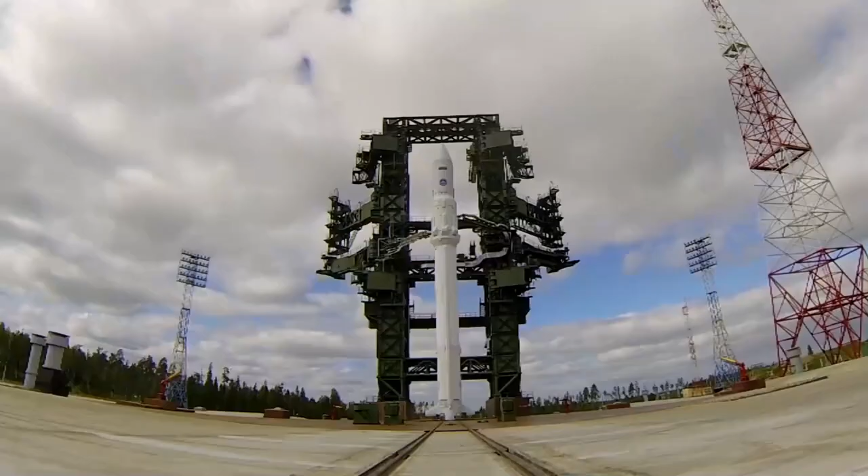Engaging the second system of telemetric measurements. Control parameters are normal. First engine start, go. Contact recovery, go.

We are at the Chkalovsky airfield, where we are about to end a journey that started 20 years ago. On board a military airplane, we'll fly to Plesetsk, where we'll take part in a pioneer rally. There will be plenty of fire, flying, and the one and only pioneer that will open a new era for Russian spaceflight.

Under the cover of the Arkhangelsk taiga lies Plesetsk, one of the largest cosmodromes in the world and also the most northern. It was built in 1960 as a base for intercontinental missiles. It was meant to be lost on the pages of secret documents. Even the roads were masked, protecting against filming from the air.

But today, this is not just a military facility. It is the most important test, research, and of course, launching platform in Russia. To date, Plesetsk has produced nearly 1,600 launches, checked 11 missile systems, and occupies a territory of 176,000 hectares.

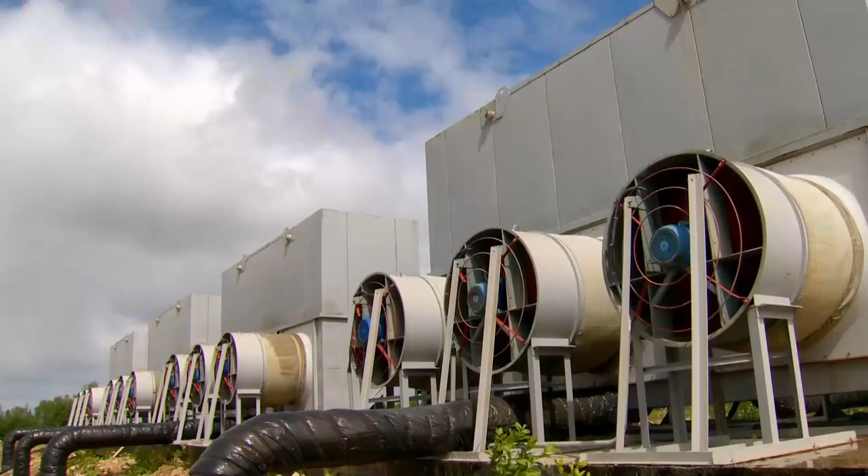The platform has launch complexes for the main Russian rocket carriers: Molniya M, Soyuz, Cyclone, Rokot, Cosmos 3M, and missile complex Topol M. But that's not all. This is where Russia has the opportunity to deploy its rockets into geostationary orbit at minimum cost.

Before, all the heavy rocket carriers started from Baikonur, located in Kazakhstan. But thanks to the Angara project, Russia will finally acquire its independence in space. We decided to take a closer look at the future of rocket building in its natural habitat.

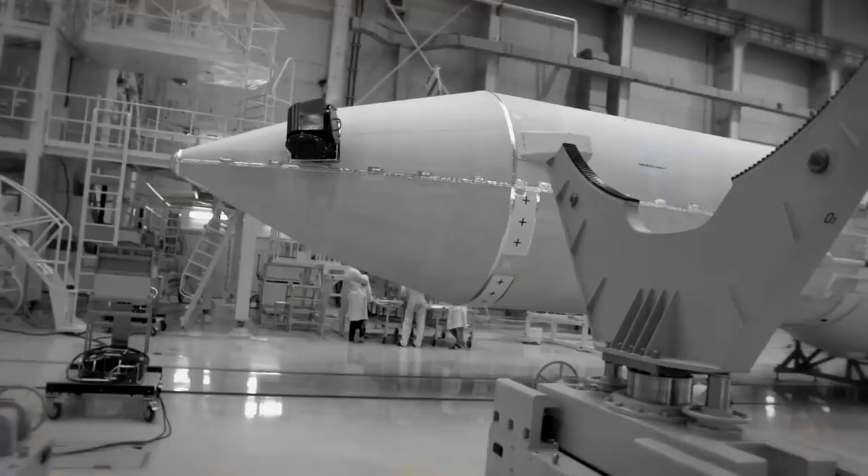Angara is a whole family of light, medium, and heavy class rockets with an oxygen kerosene engine, created based on a universal rocket module. The first one to prepare for a trip into orbit was the light rocket carrier Angara 1.2 PP. The main goal of the launch was to check the engines and rocket systems, including the navigational and telemetric equipment, as well as the proper functioning of the space rocket complex components.

The cargo layout mimics the head of the rocket payload, and having passed 5,700 kilometers, it will land in a specified area of the Kamchatka Peninsula.

It was here in this spacious, bright room that the most important stage, the final assembly of the rocket, is held. This assembly test body has all the necessary equipment for the independent testing of missile units, its assembly, and subsequent loading onto the transporter.

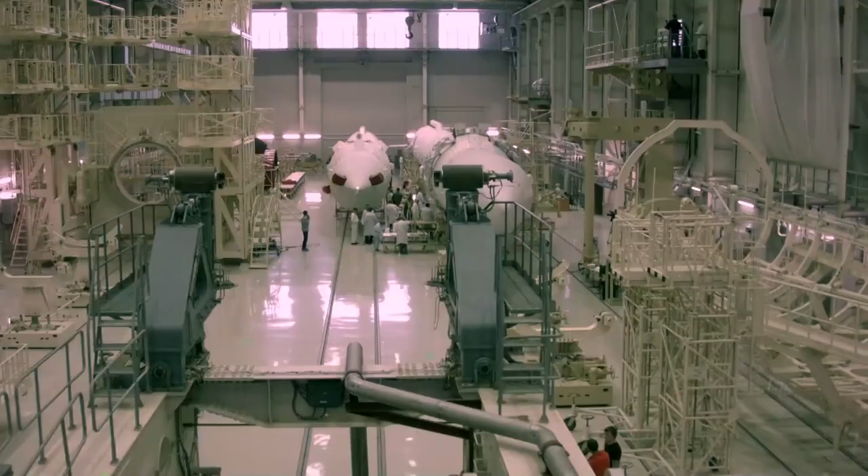The entire history of the Angara is like a reflection of Russia's recent history. Conceived as early as 1992, the rocket passed through the echo of USSR's collapse, the criminal 90s, and even the economic crisis of 2008. And now the Angara project comes to the finish line, holding its first test start.

This is the layout of Angara, but not just an imitation, but a complete missile, able to send a satellite into orbit if needed. Alexander will tell me about its components and the principles of modular assembly. Yes, indeed, this rocket carrier was built according to a modular assembly principle.

The rocket consists of a Unified Missile Module 1 and Unified Missile Module 2. If necessary, the missile modules can be arranged into a light-class rocket carrier, as we see now, and also into a middle-class or heavy-class launch vehicle.

Angara 1.2 PP consists of a first stage, second stage, nose fairing, payload weight layout, and booster. By adding universal rocket modules, URMs, we get a whole range of rockets from light to heavy class capable of performing a variety of tasks for the needs of military and space.

One launch pad for light, medium, and heavy rockets, only thanks to modularity. Yes, the system is the same in the starting complex and the processing facility. No changes or additional preparation when changing the rocket would be required.

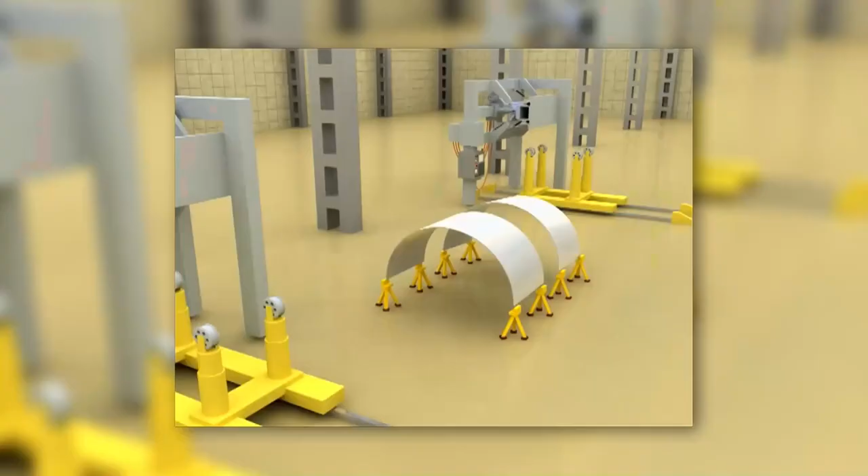The lead developer of the missile is the Khrunichev Scientific Production Center, one of the largest branches of which is in Omsk. At the Polyot Industrial Association, URMs are assembled for the Angara.

First, they work with the preform for the rocket fuel tank. They mount the technological rings and other accessories for loading and docking. Next, there is a connection of the longitudinal joints by friction welding.

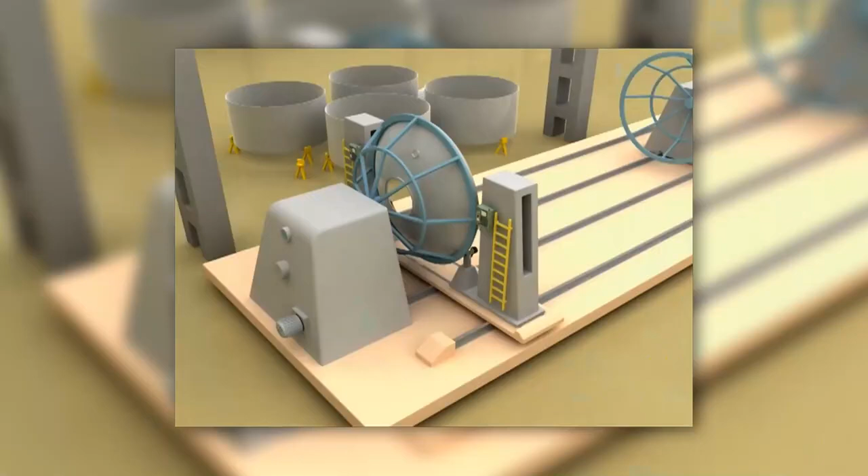Today, this is the most modern technology, based on the principle of friction between different surfaces until a complete merger. In contrast to conventional welding, friction prevents thickening. On this machine, all the other parts of the missile, including the bottom of the fuel tank, will also be lapped onto each other using this method. Next, the bottom is welded to the tank, and so we get a tank for the URM-1 oxidant.

With the help of technological rings, the tank is turned over to a vertical position in order to check for leaks. This is followed by hydro testing. The space of the tank is filled with liquid, after which they monitor and inspect for leaks.

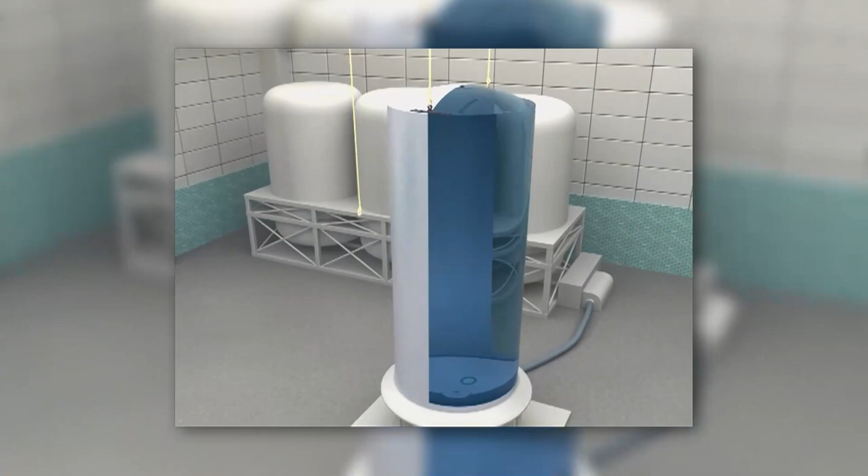Then the tank is driven into a separate chamber to install the inner tank devices. The sterility and purity of the chamber is key to the safe and trouble-free operation of the engine afterwards. The thing is, if the fuel has technological impurities from the factory, a rocket engine fire is impossible to prevent.

Apart from inner tank devices, expendable pipe and fuel level monitoring sensors are also installed into the tank. The URM-1 has separate tanks for oxygen and kerosene. After installing the inner tank dry compartment, the engine compartment and the adapter ring for the subsequent installation of the propulsion system are secured. After closing the engine compartment, URM is ready for final assembly.

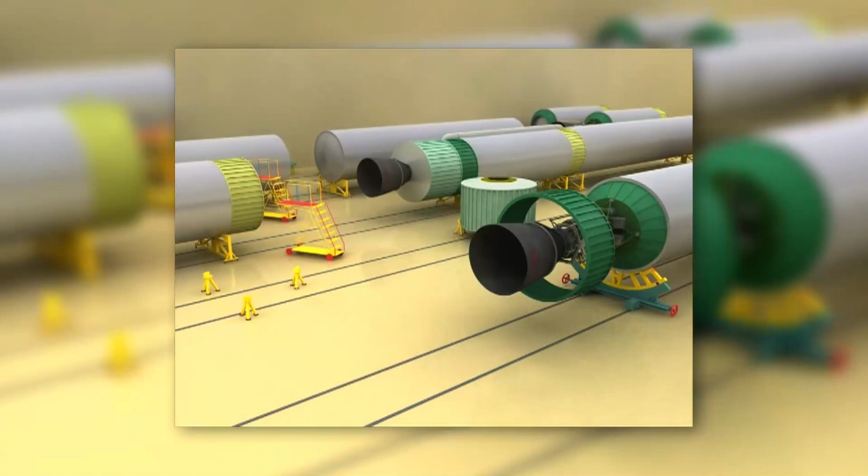The only thing that remains is to establish a trunk line through which the oxidizer enters the engine. Fuel is poured directly. After being laid down on the railway unit, the URM is sent to Moscow to the Khrunichev Scientific Production Center, and then, after all the independent tests, it is sent in an unassembled state to the Arkhangelsk region, where final assembly will begin.

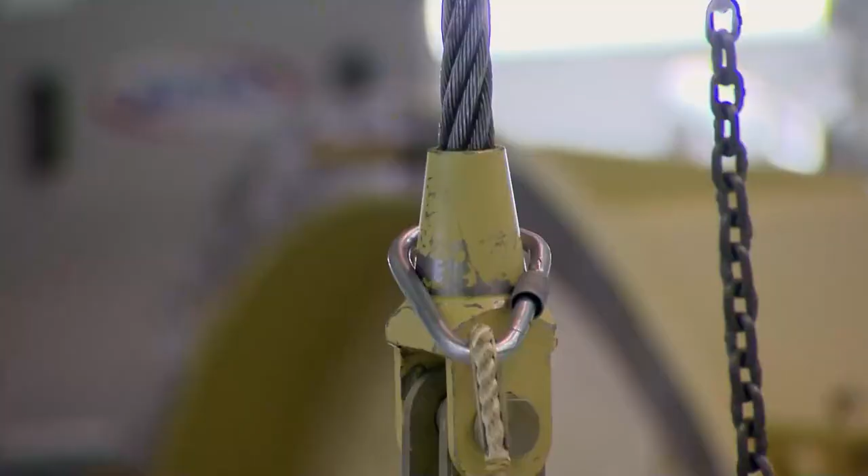Now we see the process of loading the rocket onto the installer. Next to me is Mikhail, who will tell me how the loading happens. Hello. Hello? We are now in the processing facility that prepares the family of Angara launch vehicles.

Right now, what you're seeing is the final step of this technological process. The first launch booster completed all the necessary tests at the processing facility and is ready for start. This operation makes this rocket ready for launch. The military calls this process overload. I fully agree with them.

When 18 tons of weight, that's exactly how much a dry rocket weighs, flies over you, you automatically start to feel like a dwarf in the world of giants. At the same time, in order to successfully install the Angara on the conveyor, all work must be completed with a tolerance of less than a millimeter.

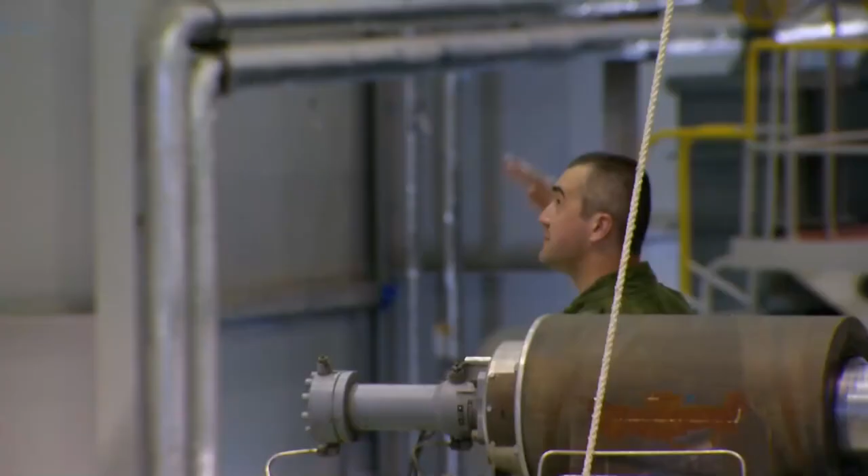Already the next day, the combat crew will take the rocket to the launch pad, where it will pass all required tests and will be prepared for launch. Taking advantage of the moment, we decided to leave the Angara and take a walk along the launch complex.

All these huge buildings behind me are just the tip of the iceberg. The Universal Launch Complex of the Plesetsk Cosmodrome has more than 200 buildings and power plants hidden deep underground. The extent of all this is staggering.

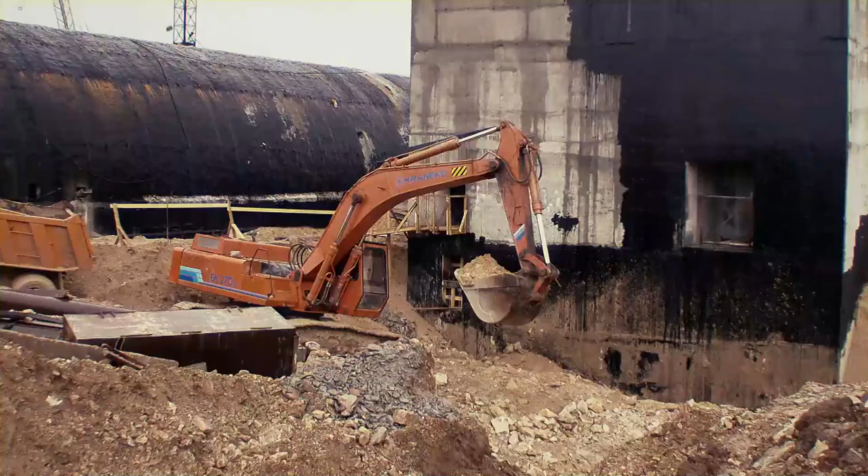Long and thorny was the path of the Angara launch complex. The fact of the matter is that here in 1987, construction of another rocket complex, the rocket carrier Zenit, started. But when in 1994 the country went through a crisis, construction froze for an indefinite term. It was only in 2000 that it was decided to build a new complex using the unfinished buildings of the old complex.

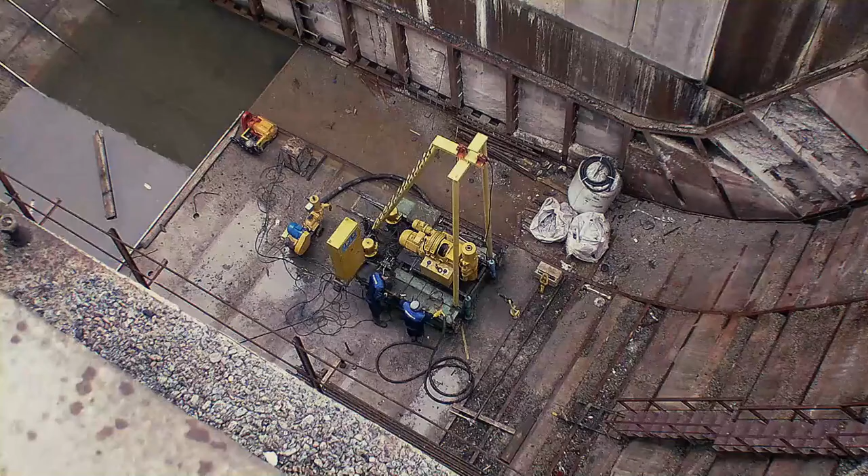Construction inherited from the Zenit complex did not have the required bearing capacity, so designers had to solve the difficult task of strengthening the foundations, basements, and walls of the buildings. A year and a half ago, the backlog in some areas reached semi-annual figures, and the defense minister took personal control of the implementation of the plan.

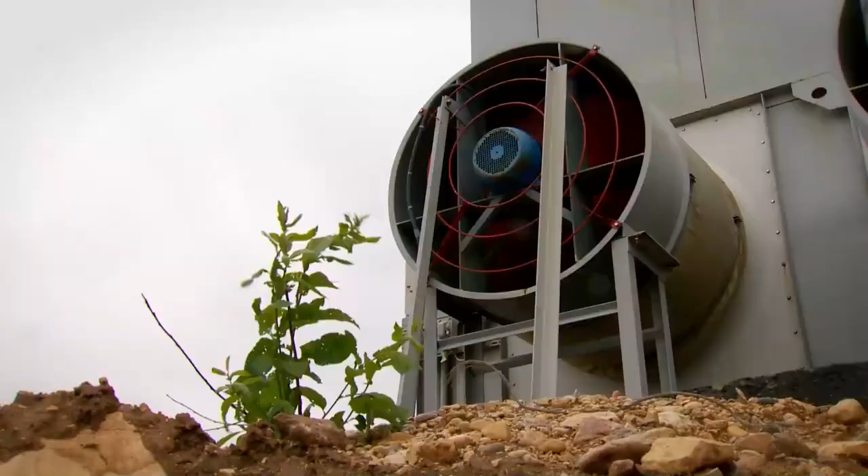The backlog was reduced, and now the Universal Launch Complex Angara comprises 22 kilometers of engineering networks and communications, more than 90,000 cubic meters of concrete, and 211 buildings that fit compactly on a territory of 12 hectares. The farthest point from the checkpoint is the starting platform, which houses the launch pad and the cable-fueling tower. To the left of it is a firefighting station. A bit further is the entrenched command post, from where the missile is controlled. The launch complex also features a thermostating station, an oxygen-nitrogen plant, refueling unit, compressor station, and effluents, not counting the external power supply and water supply installations.

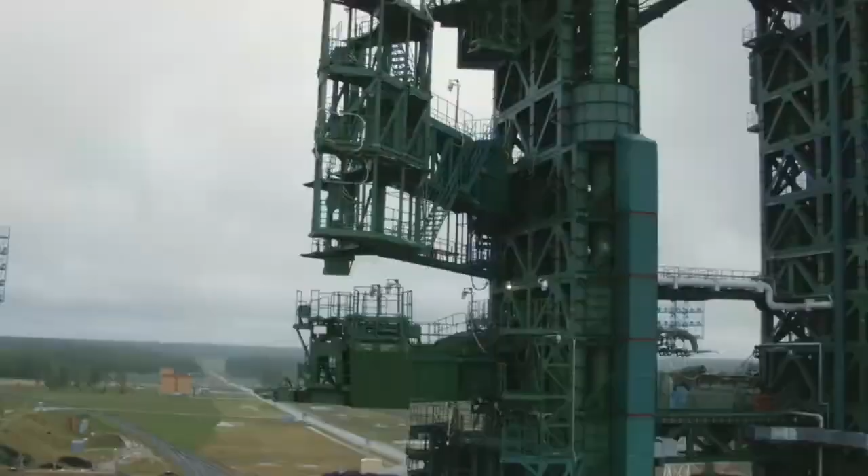I am at an altitude of 54 meters on top of a huge mountain of steel called the cable filling station. It weighs about 1,500 tons and is used for filling and retaining the rocket. The cable filling tower also performs a windproof function - even a force 7 wind will not overturn the rocket. It is in this building that the highways of working gases, fuel supply, as well as all electrical cables and information networks are located. It's virtually like a cocoon for a butterfly, but instead of colors, our butterfly is interested in space.

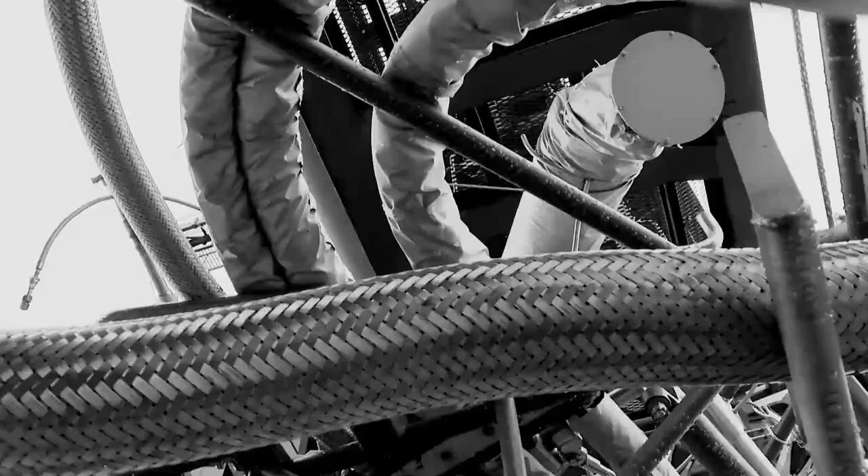I, in turn, was interested in a huge metal platform at the base of the cable-filling towers. The device which we are now on is called the launch pad. This is where the launch vehicle is located at the time of launch, along with all the communications designed to prepare the rocket for the launch. The launch pad is the heart of any launch complex.

Its metal cladding is like a medieval breastplate weighing 500 tons, protecting the area from jet fire during the rocket's takeoff. None of the plates are fixed and have clearances. This ensures that during the moment of dynamic impact, the expanded metal does not deform. Under the plates, there are several layers of thermal insulation.

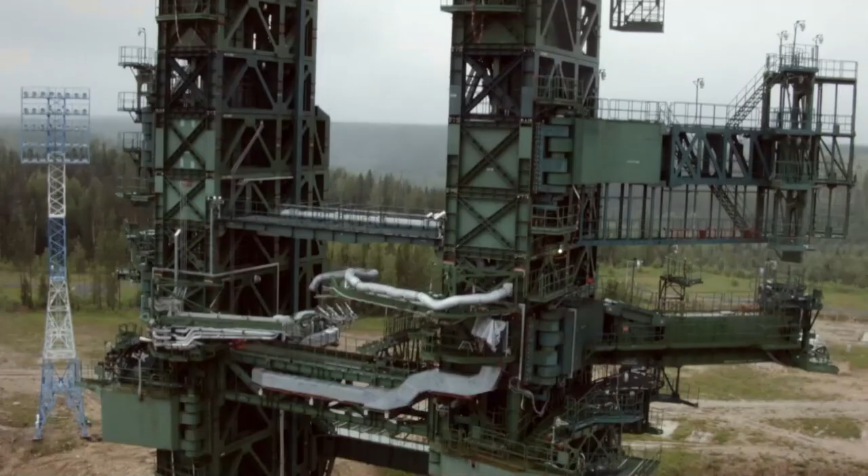Are there any measurement devices in the launch pad itself? Yes, there are sensors, measurement systems, and technological equipment in the compartments of the launch pad, as well as in the gas duct and the cable filling tower, which are intended for the measurement of physical quantities such as dynamic effects, vibratory loads, temperature, etc. In general, we get a complete physical picture at the time of startup.

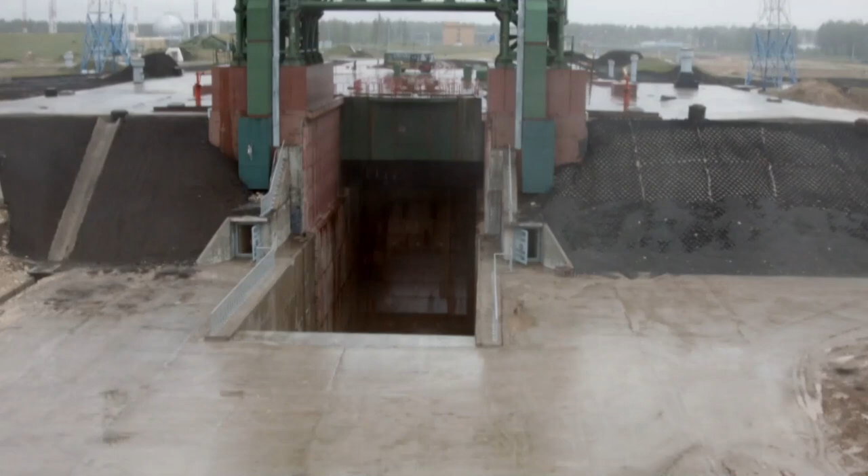The preservation of the launch pad during launch is provided by a direct gas duct with an exhaust gas deflector. During the launch, tons of water for cooling will be pumped there. Next to the launch pad, there is a control station for the fire extinguishing system. There are systems of water, water foam, and halon fire extinguishing at their disposal. 4 masts are charged with water and foam straitjackets to cool the ardor of rockets.

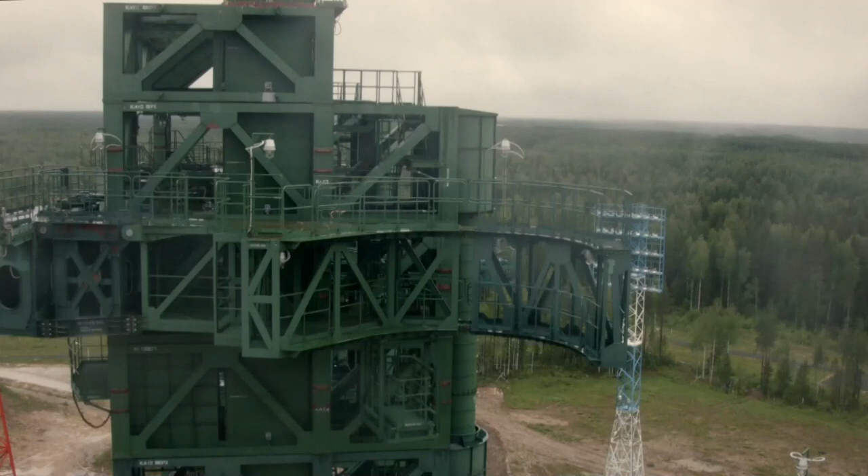In general, are there a lot or a few launching or propulsion systems that provide the start of every rocket? I can say that Spetsstroj provided the installation of 36 technological systems for the launch complex. This includes the basic cycle preparation system and rocket preparations here on the launch complex. The main systems include a standard filling system, a liquid oxygen filling system, a naphthyl refilling system, and a system providing compressed air, which includes both production and filling of compressed air as well as other working gases. There are 3 kinds of gases used here: helium, nitrogen, and air.

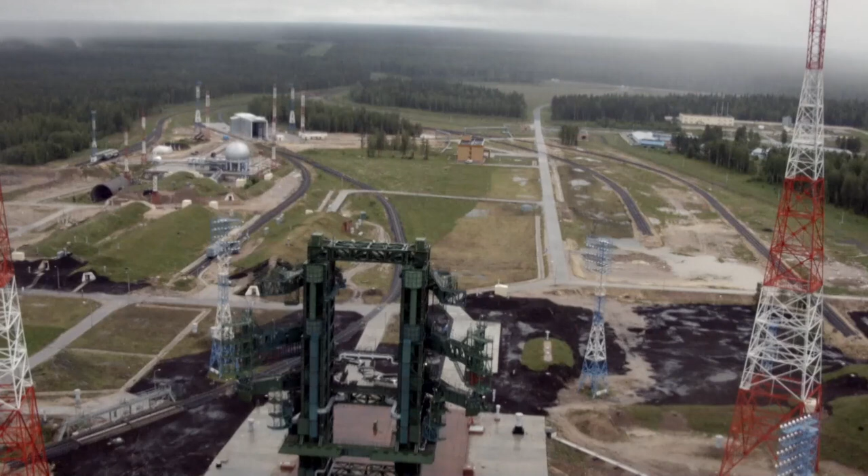The versatility of the launch facility allows the launch of light and heavy rockets without adjustment. In the context of military application, for example, when restoring the orbital satellite constellation, launches will be conducted continuously. That is why they are considering the construction of a second launch facility. Every technological complex and building has a backup body that provides not only flexibility but also the reliability of reinforced concrete.

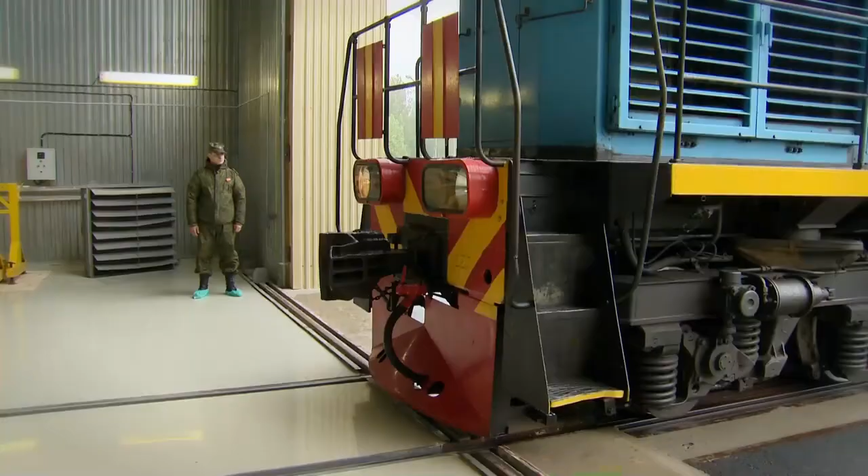The next morning began with the construction and formulation of the problem of transportation of the Angara. The escort service, together with combat duty assignment, took their places according to protocol. Then the locomotive for docking came up. After checking the connection, our train started moving.

We ought to hurry. There's less than 57 hours till the launch. It's about 7 a.m. now. I terribly want to sleep, but all services and combat duty assignments are long in place. Together, we'll participate in the Angara's transportation to the launch pad, and I can finally feel like a true space loader. Igor will tell me how the whole operation is going.

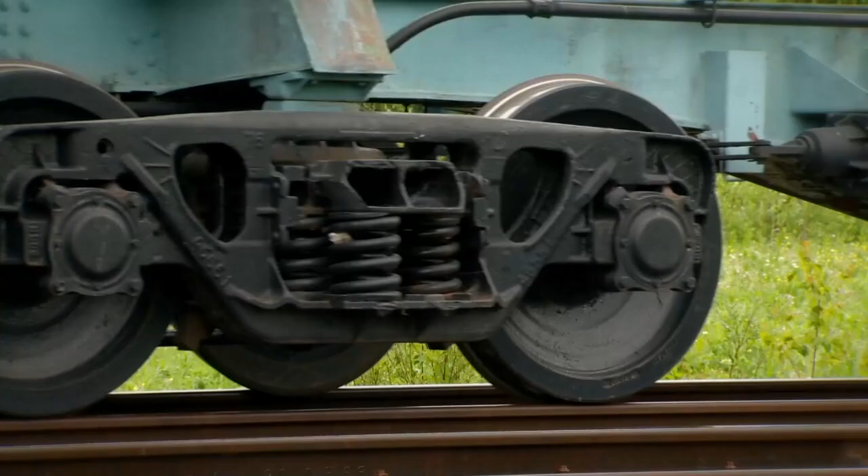Hello? Igor, why are we moving at such a slow speed? Such are the requirements for transportation. The speed should not exceed 5 kilometers per hour so that we can safely transport a product that took a long time to prepare for combat assignments at the technical facility, and guarantee it the safe and sound start of its trials.

In the transport group is the diesel locomotive that pulls the entire train. Further, we see the platform through which the locomotive and the installer are connected.

The Angara complex has 2 installers, for the light and the heavy launch vehicle. The weight of ours is more than 100 tons.

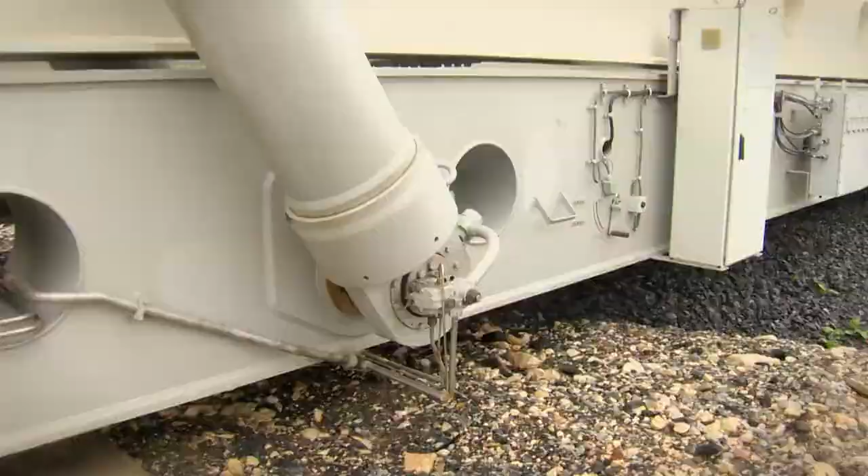The installer's huge mass gives it a very low ground clearance, so the dimensions of transportation are 5 meters from the main track, so the dimensions of motion are 10 meters. That is why there are no structures in the way to provide a 10-meter distance. Don't forget the very low ground clearance.

All the railroad crossings were forced to be aligned, taking into account the clearance of the heavy and light class rockets. Are you saying the railroad was specifically rebuilt for the installer? The tracks and adjacent roads, railroad crossings, everything was aligned according to the installer. Prior to this, we repeatedly rolled it, confirming all of the dimensions, after which the construction companies performed work on

retrofitting these crossings. This road here is the so-called special way number 1. It is special because it has features needed only for the transport of a space rocket from the technical complex to the launch pad.

Our railway tour of the Arkhangelsk region continued. In total, we completed 3 kilometers. The changing of the weather worried us. And although transportation does not depend on weather conditions, we weren't really wishing for heavy rain.

The interaction between railway workers and combat soldiers was ensured by eye contact or radios, reporting the successful completion of waypoints. Ahead of us was another 4 kilometers of the taiga.

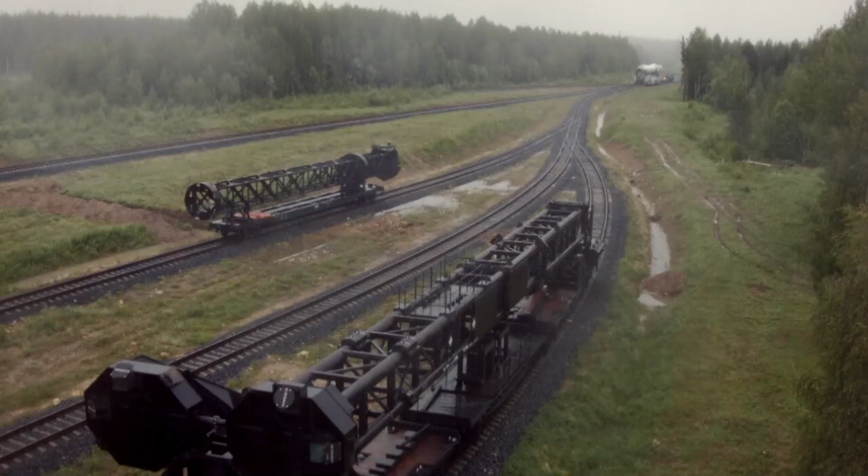Along the way, we saw a few checkpoints. Each point has everything you need for the emergency repair of the tracks or a stuck train. In the open areas, my glance rested on the fences that hide way number 1 away from prying eyes.

Meanwhile, the locomotive began to slow down its initially not so high speed. This is where the locomotive stops and continues its motion only with the tail compartment forward.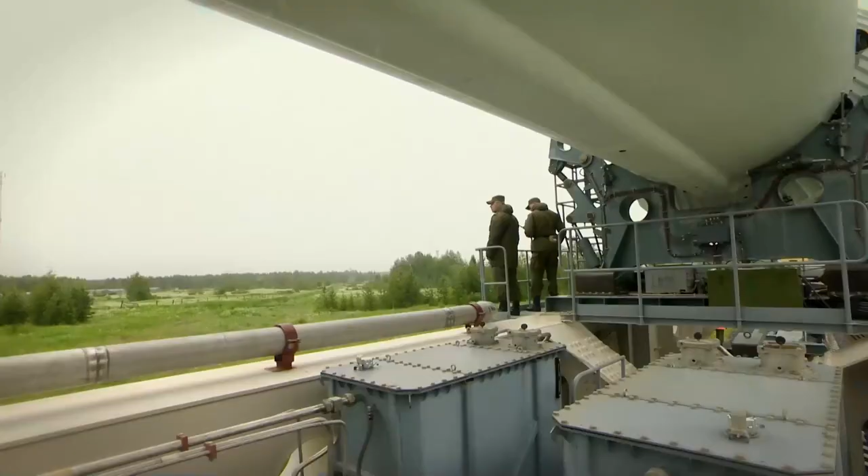The weather began to change for the better. Even the sun came out.

At the launch site, the installer must enter first to provide the necessary docking units, and the locomotive could be sent to the depot. The track has a special configuration and is built precisely for these tasks. The position of each track and railway sleepers were measured virtually by hand. Such a load and weight excludes sharp turns.

We're passing some sort of hangar. Is it a repository or is it some kind of gate? What is it? No, we've entered the universal launch pad, the starting position. And the first building we encounter along the way is a complex of low-pressure filling tanks for the Breeze M booster block of the Angara A5 heavy-class space rocket.

The construction part is not yet finished. It's still going on in its second stage.

And in this case, we have a little tradition at spaceports that has taken root at the Angara as well. In order to commemorate the beginning of some stage of work that's important and interesting, we put a coin on the rails and we press it with the installers.

I want to give you such a coin. Thank you. This, in memory of this significant event, the transportation of the Angara rocket to its first universal launch facility.

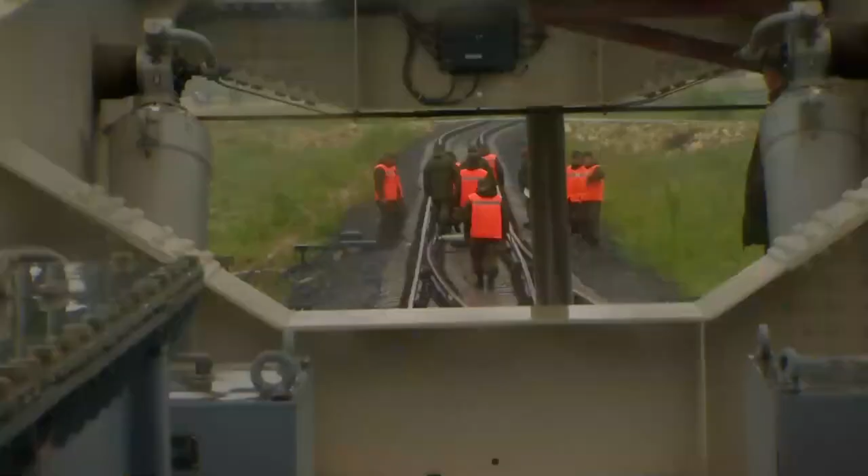Our train was greeted by a large number of people. Military and civilian experts waited for 2 hours for the Angara to appear on the horizon.

The Angara's high-speed train is arriving on the first way. Everyone goes to the greeting dock.

Next, the locomotive will unhook from the site and the installer will cover the last 4 meters with the help of its own electric drive.

The most important part of the transportation is the docking of all electrical and hydraulic power units with the launch system. To do this, the installer reaches the control points and makes runs over the carriage of the automatic docking unit. This completes the transportation process.

But this is only the first step of a ladder abutting straight into the sky. The entire launch pad froze in anticipation of the ascent. Less than 3 days left to the launch.

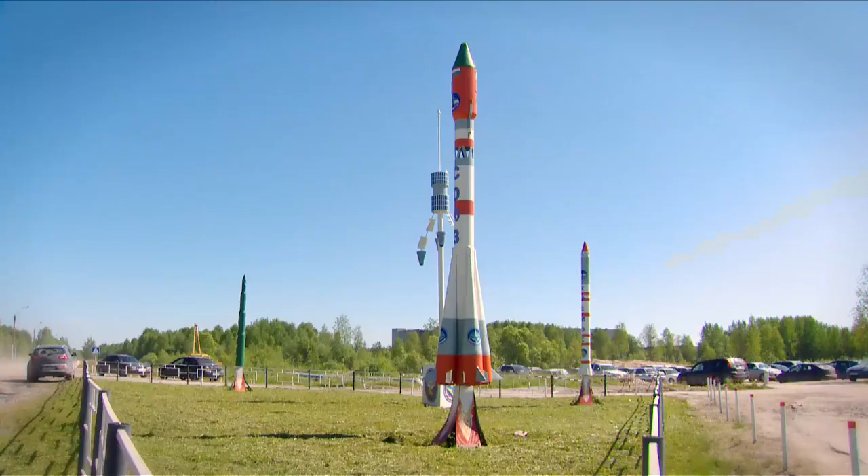The entire population of the city, that's about 30,000 people, in one way or another work for the launch site. Mirny itself fully justifies its name. Here, a pleasant and unhurried contemplation of the cosmos reigns. However, this calmness is deceptive. A few dozen kilometers from the town, historical events are occurring.

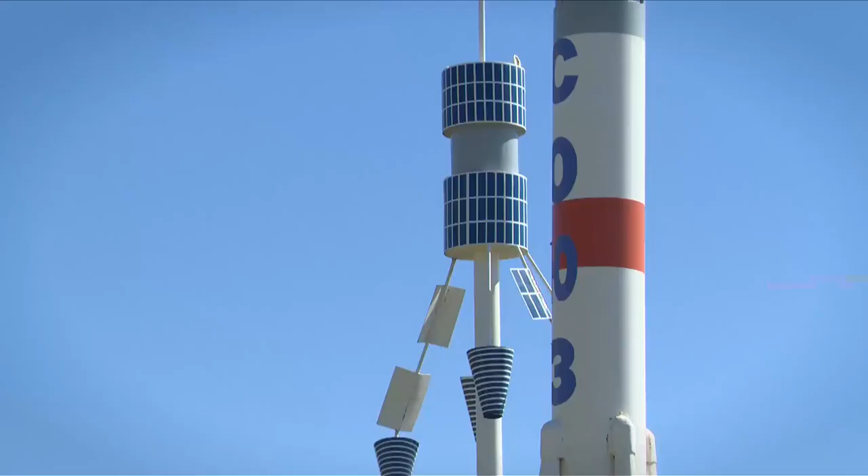Having left the Chkalovsky military airfield, our program is now in the city of Mirny in the Arkhangelsk Oblast. Located near the Plesetsk Cosmodrome, the city introduced us to the most promising project of the space industry named Angara. We already spent 2 days preparing for the test missile launch of the Angara 1.2 PP, as well as its transportation to the launch site.

There was a serious operation ahead of us: installing the rocket on the launch pad. The power supply must be installed manually, and I was even entrusted to connect the power cable. I am now connecting the power supply. You need to get it right into the grooves. One, there it is, power's connected.

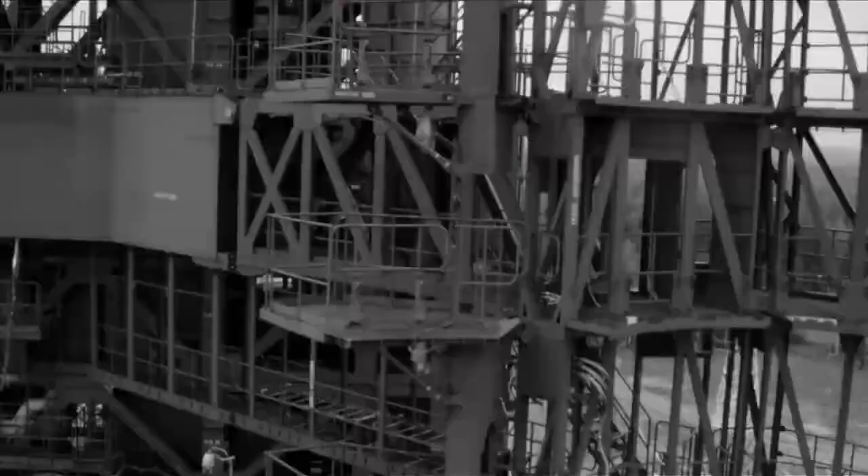After the installation of the power supply, the installation of the rocket on the launch pad begins. All operations are occurring in a normal mode, which means everything is controlled automatically.

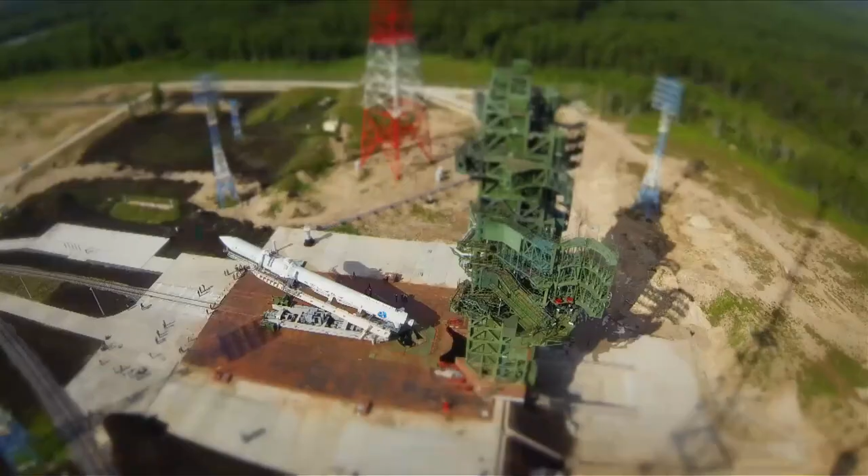Before the lifting of the boom with the Angara, the installer itself rises above the rail by using 2 hydro bearings. The boom is set in motion and 4 telescopic hydro cylinders begin to lift the precious cargo. The operator monitors the process from the command post with the help of angle sensors and limit switches. The whole construction stops itself after reaching a 90-degree angle.

Next, the installer frame drops due to retracting hydro bearings. The missile assumes a vertical position automatically thanks to free flow of fluid between the hydro cylinder grippers near the tail section. As a rule, the rocket will stand motionless and under its own weight thanks to the design of the starting system and the 4 thrust bearings on which it rests.

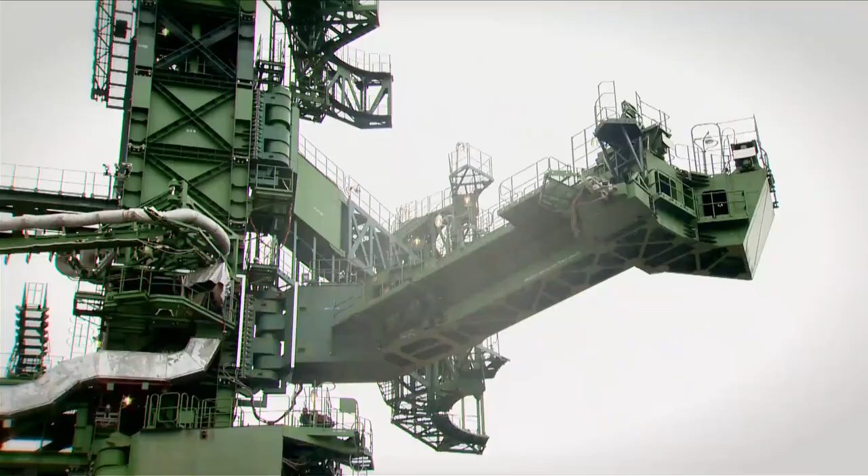In addition, further service platforms are added acting as containment booms. Next, the combat squad will only need to dismantle the removable elements of the missile, connect the contact lift electrode connectors, and breathe a sigh of relief.

After the installation, a 3-day preparation cycle for the start begins. Brigades of assemblers consisting of those who work in the aerospace and defense industry together with civilian specialists decorate the rocket like a Christmas tree, only instead of Christmas lights, they use refueling systems, power systems, and communication systems, as well as systems of thermostatic control that maintain a certain temperature inside the rocket. They must also ensure communication with the automated launch system, as well as the pipelines for oxygen, nitrogen, and helium.

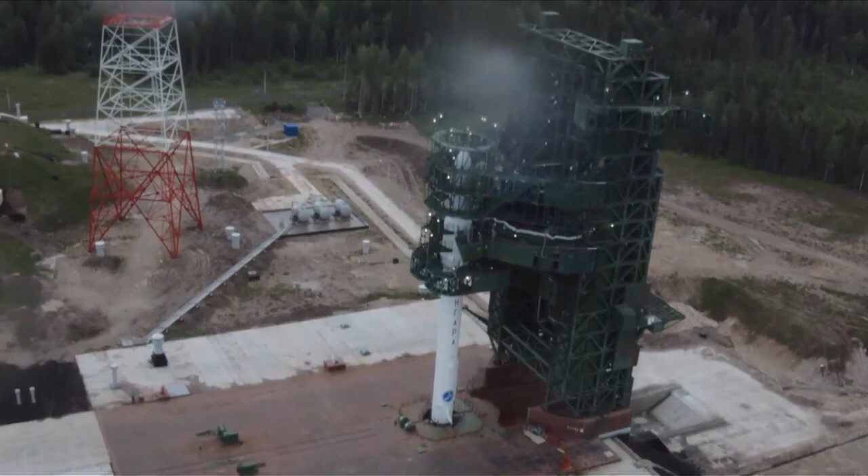Having left the Angara for preparation, we decide to find out where all these gases are actually stored. Victory in space is achieved by hard work on the ground. The infrastructure of the launch complex includes more than 200 buildings. This huge silver ball is the oxygen repository with a capacity of 1,400 cubic meters.

Why does it smoke like a tea kettle? I will ask Anatoly. Greetings. Hello. We are at the complex responsible for the filling and storage of oxygen.

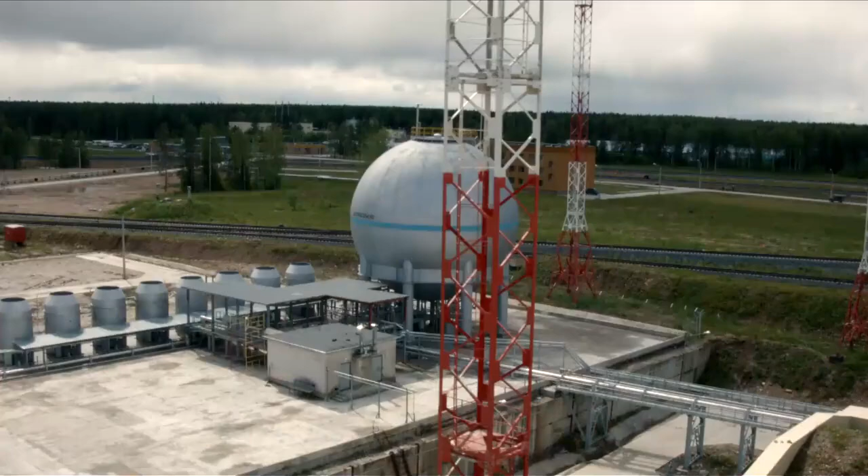What we can see now is the cooling of the highways, and the liquid nitrogen turns into a gaseous state through the following blocks, which are now emitting large amounts of cold. After cooling, the vacuuming of the lines and cryogenic piping through which the rocket fuel components, in this case oxygen, is supplied to go on board the rocket will begin. Simply put, what's happening is the cooling and the pressurization of the pipe.

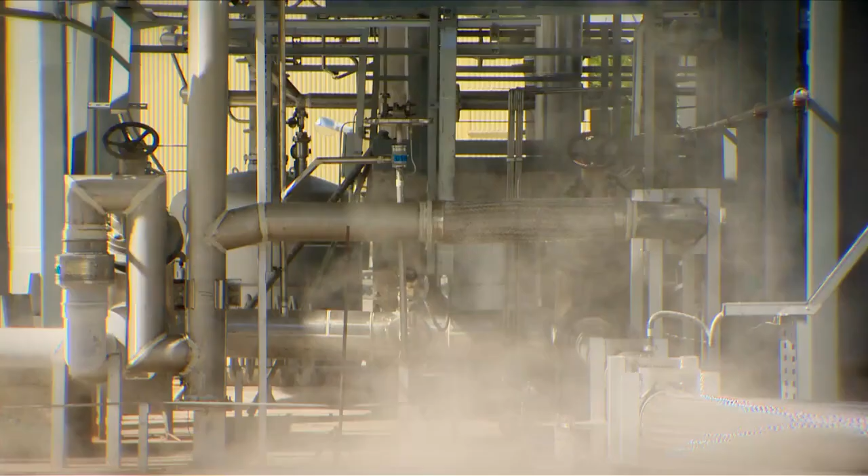It is cooled with liquid nitrogen, which when heated becomes a gas, thus lowering the temperature around it. The oxygen is cooled to minus 180 degrees Celsius and becomes liquid. Such low temperature is maintained by a special cryogenic pipeline during the transportation, and by the missile thermostatic system upon start.

Naphtha, also known as kerosene, is also cooled to minus 15 degrees Celsius. This is done to reduce the volume so that more can fit. The rocket also uses helium for the pressurization of the tanks, which compensates the excessive pressure in the voids in the rocket carrier. Roughly speaking, the missile resembles a plastic bottle of soda upside down. If you press down on the space that no longer has liquid, the bottle will crumple. But in the rocket carrier, parallel to the burning fuel, helium is released. That way, everything will be fine.

So what other constructions are there on the territory of the launch complex? The main structures through which the oxygen is supplied on board the rocket are underground, and that's where we're going. We're going underground? Come on.

The so-called technological caves can be accessed through protected entrances. The use of underground space for technological needs is an industrial necessity. You could not fit all the gas storage, compression highways, and other areas on the surface. The lowest level of underground utilities is equal to the height of a 6-story building. All the underground constructions communicate with each other by means of channels spreading more than 5 kilometers in length.

The burying of the buildings was carried out in order to improve safety during the launch. After all, a rocket is first of all a huge tank with hundreds of tons of explosive substances.

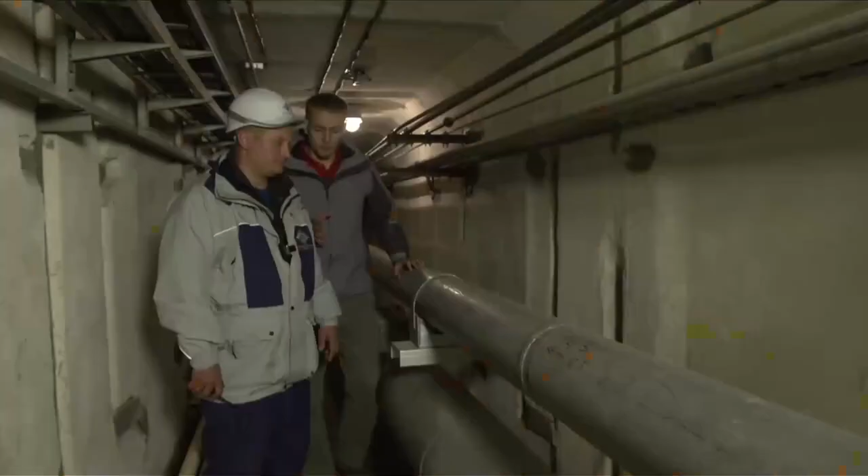We are in the communication channel. This is the pipeline through which oxygen is supplied to the launch vehicle. There's not only oxygen here, we can also see compressed air, helium, and nitrogen. Everything goes along this communication channel, enters the space of the launch complex, after which it spreads to the docking device to which the oxidizer or oxygen is connected, and finally pumped on board the rocket.

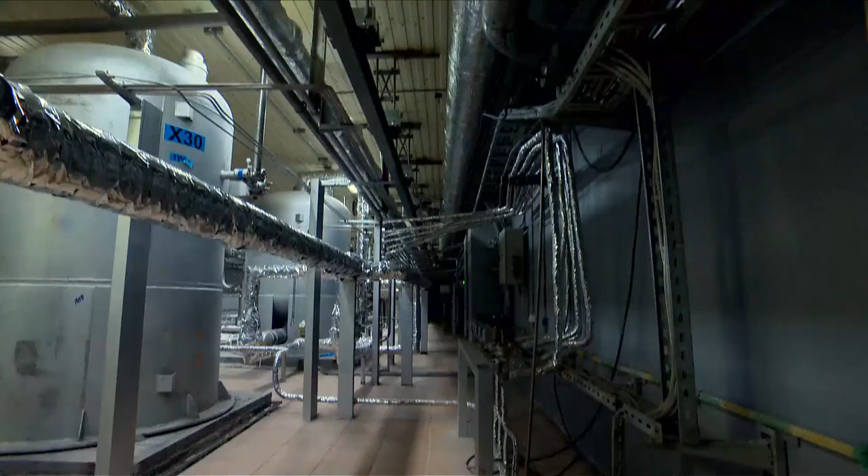Underground, there are a number of interesting buildings, such as the compressor. You can shout at the top of your lungs, but nothing will be heard because of the hum of machinery, because all the controls on the launch pad are either electric or pneumatic. This is the place from where the working gas that ensures the mobility of the joints of our cosmic beast is fed.

This room is a huge cryogenic plant. This is the room through which the oxygen from the storage facilities is passed by pipeline to the docking device and then on board the rocket. So all of the oxygen is concentrated here, cools, and then is fed to the rocket from here. I understand this is, in general, a very explosive production.

Yes, in the case of an oxygen leak or fire, it can be a very dangerous environment. That is why there are showering stations provided here.

Are they working now? Yes, they work. So let's check them, maybe. Let's go. So how does this machine work? You're on fire and you run there, God forbid - that is, of course, if you're really on fire. There's the water, right? Right, good. So I'm on fire, here at this end, that's all? Now stop, get out of here. It pours, that's all. Of course the fire's put out and you are saved. That's it, I got it. So I'm generally saved. After such water treatment, I need a bit of fresh air. Where is it? Well, let's go. Here's the exit.

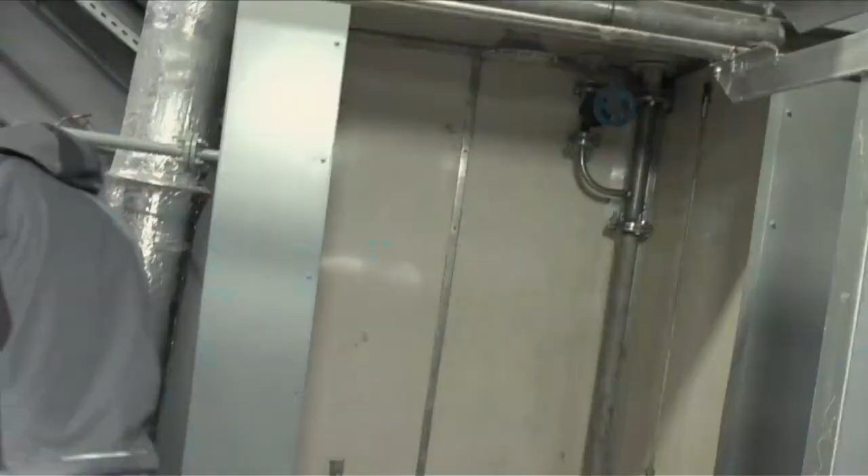On the next day, the missile was passing all the necessary onboard systems checks and was confidently moving towards the launch. As a rule, the military guys explained to us that it's better to say contact lift instead of lift off. In any case, while the entire site was preparing the Angara, I had my own individual contact lift.

The height cleanses. This is true not only for missiles, but for people.

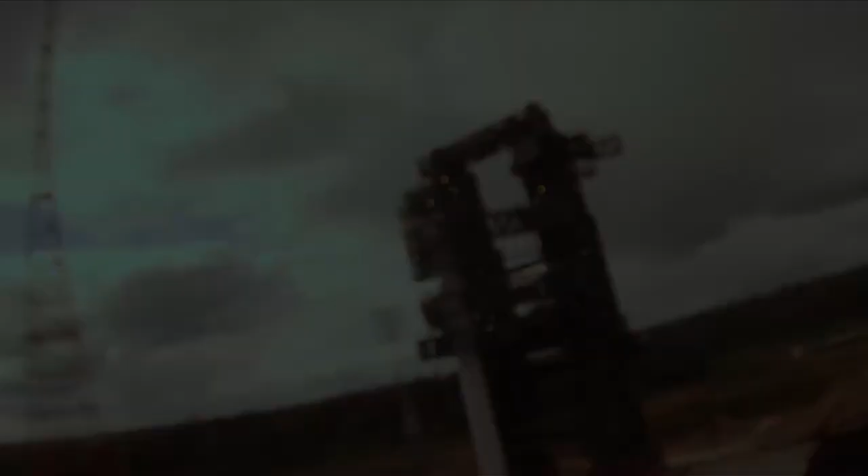I climbed the light tower to a height of 30 meters to install the camera. As they say, there can't be too many cameras for a historical moment. The camera was in its place, and at this point the rocket was busy testing its unique RD-191 engine, developed in the city of Khimki, where a detailed account of the main driving force behind rocketry awaited us.

We are located in the territory where the development and production of missile engines has been maintained for over 85 years. Every second missile in the world is powered by an engine from Energomash. Today we'll get acquainted with the ideas, technology, and of course the people who created the engine for the Angara.

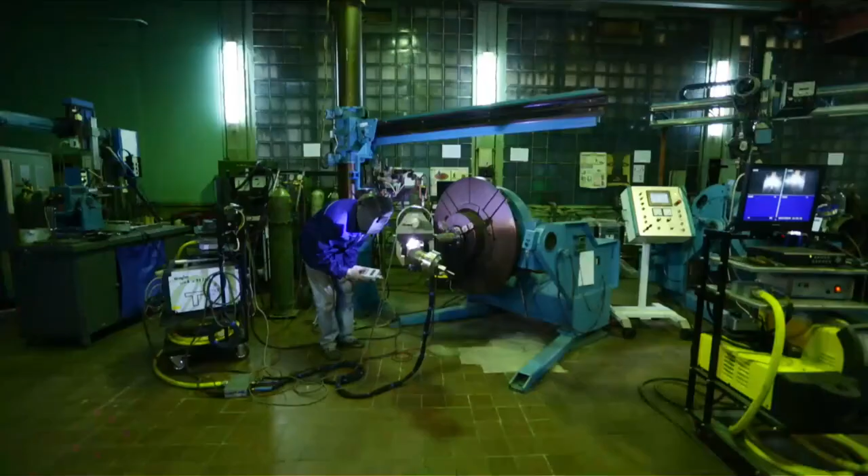This scientific production facility employs more than 4,000 professionals, and the production facilities themselves occupy more than 90 hectares, in which rocket engines are developed, tested, and produced.

This showroom boasts displays of the main engines produced at this plant. This includes the legendary 107 engine from which the whole space program started and the world's first satellite was launched. Thanks to this engine, the whole world knows the name of Yuri Gagarin. You won't find such a history-filled museum anywhere else. The entire history of Russian rocket engines is gathered here. Thanks to these steel giants, the breakthrough of space programs not only in Russia but the whole world became possible.

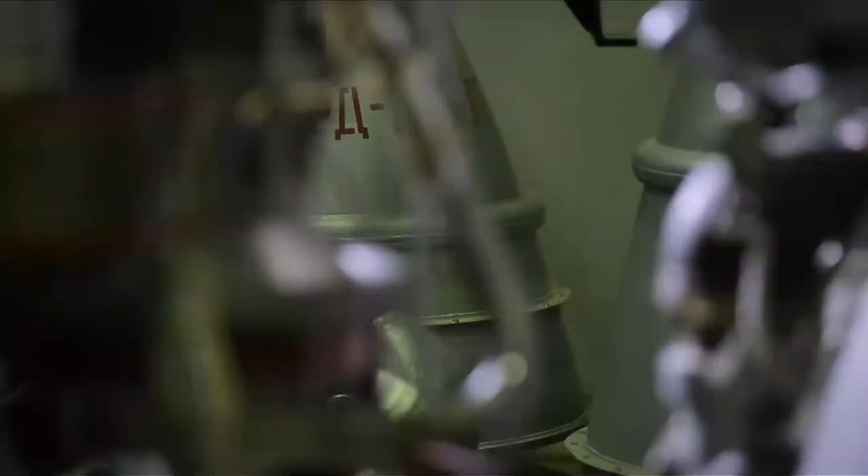And this is the cutting edge of the newest rocket engines, including the RD-191. On a territory covering more than 1,000 square meters, dozens of engines are on display, ranging from the very first liquid engine built in 1929, and ending with its very young relatives like the RD-0255 engine, installed on the fourth generation of Voyevoda strategic missile systems.

Also on display is the engine from the rocket carrier Proton, the RD-253, the most powerful single-chamber rocket engine, thanks to which the orbital station Mir entered space. Here you can also find the RD-180 engine, without which the US space program wouldn't exist. The rocket carrier Atlas uses engines developed at Energomash.

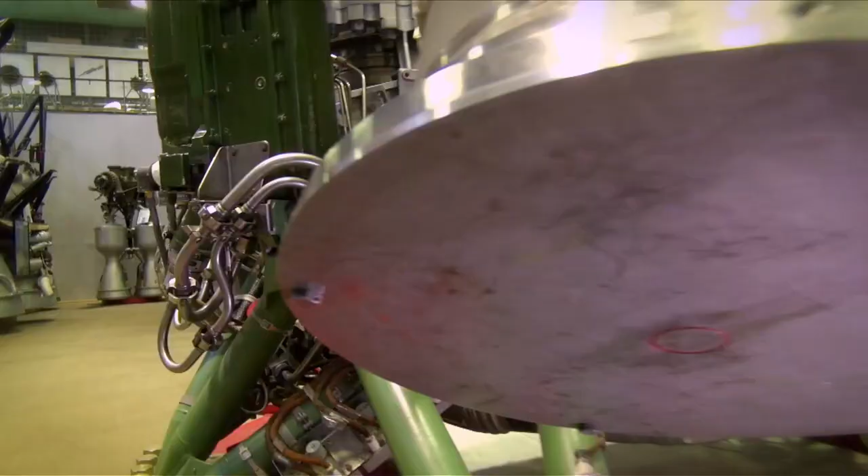This is production plant number 222. Here are the parts and individual components for the rocket engines that are produced. More than 50 machines of various types and functions, along with hundreds of manufacturing operations, which Peter Sergeyevich will help us understand. Peter? Hello, Alex. Good day.

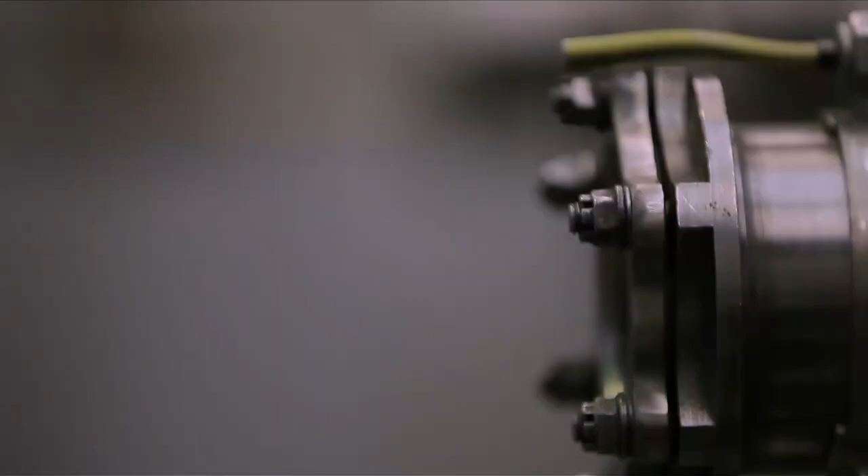What unique operation does the RD-191 engine go through before becoming part of a rocket? As always, it all starts with a procuring operation where we get the material that can work in unique environments - temperatures up to 700 degrees Celsius, pressure levels up to 1,000 atmospheres, and vibration overloads up to 300 Gs. Therefore, there are special requirements to the obtaining of the preforms. Before the part can take its place in the engine, it will go through a huge number of manufacturing steps, including machining, welding, testing, and many others.

One of the first processes awaiting the workpiece is EDM, which implies the technology of spot-on and accurate exposure of the item. It's very simple. A different voltage is supplied to the copper electrode and the workpiece. When contacting each other, the electrode and the workpiece form an electrical discharge that leads to a local metal evaporation.

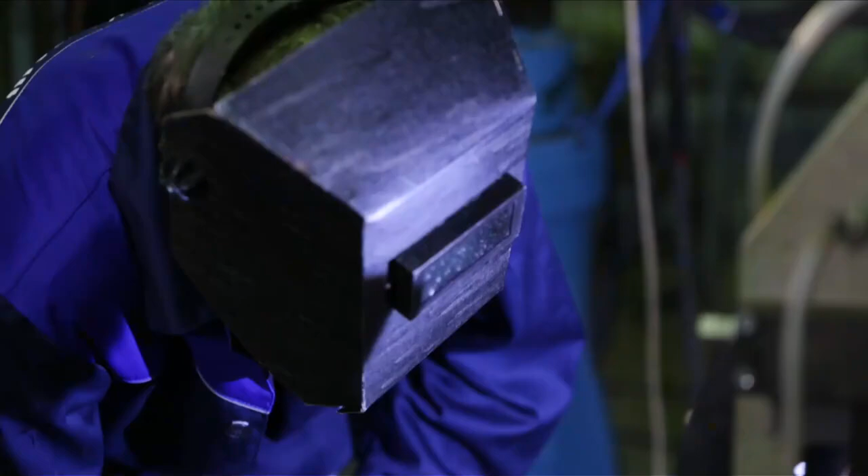If the workpiece is not whole, then its parts are paired with the help of automatic argon arc welding. Many manufacturing operations cannot be done manually, so all the hard welds are done by a machine. After the completion of all the manufacturing operations, each detail and seam are tested for balance.

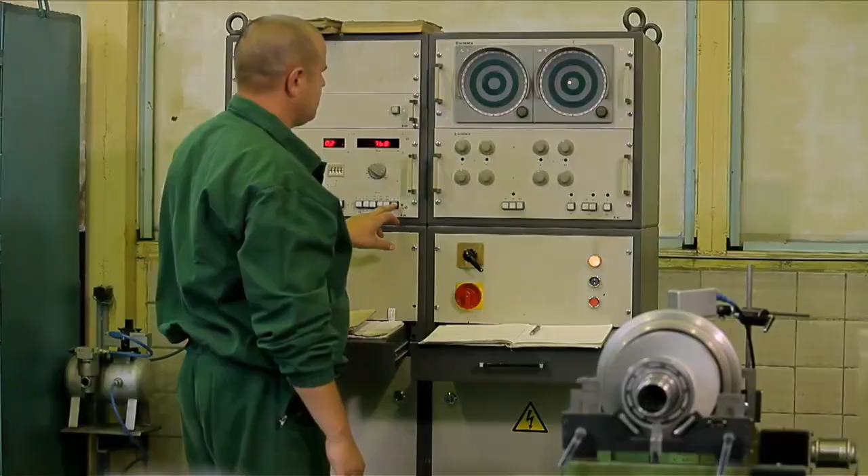The workpiece is spun at tremendous speeds to understand whether the actual axis of torsion coincides with the one given constructively. If, as a result of the test, there is a slight deviation, the technologist, with the help of conventional clay, will determine the part of the workpiece that creates the imbalance, securing it to the unbalanced side.

On the next stage, when the separate unit is assembled and parts are installed in the housing element, we carry out a range of operations to exclude the ingression of foreign particles into the unit.

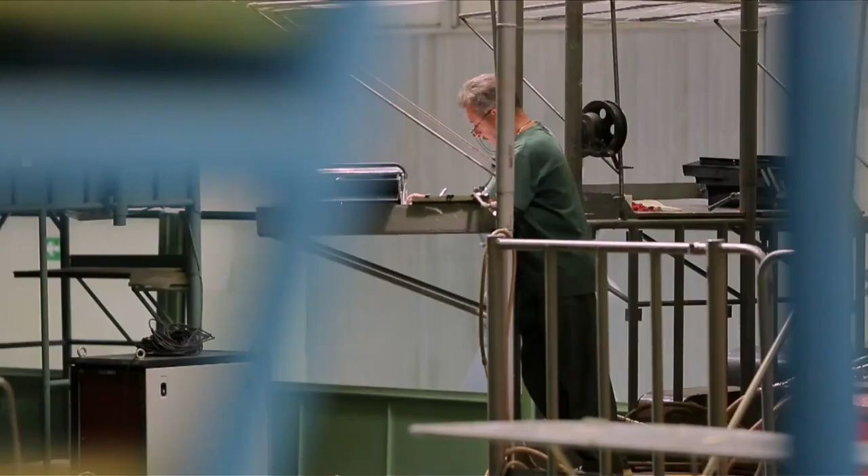Alex and I are now in the assembly workshop for the engines of our company. These include the RD-171M engine for the Zenit rocket carrier, the RD-180 engine for the Atlas rocket carrier, and the RD-191 engine for the Angara family of rockets.

The first stage of the Angara is excellent thanks to the RD-191 engine. It is a single-chamber liquid rocket engine with a pulling force of 196 tons. It was created on the basis of the RD-170. It's recognized as the most powerful engine that runs on liquid fuel. Despite this, the RD-191 is environmentally friendly - the oxygen kerosene waste is not dangerous for the environment.

The working gas is formed in the gasifier, which is then fed into the turbine. The working temperature of the gas is above 500 degrees Celsius, and its pressure is around 400 atmospheres. After leaving the turbine, the gas enters the combustion chamber, mixes with the kerosene, ignites, and ejects through the nozzle, forming a thrust. That is how the engine operates.

The interesting thing about this engine is that it can work in 100% mode - that is its nominal mode. Down to the deep throttling mode, it's about 30%. Not a single liquid rocket engine in the world can do what the 191 engine does. But this was the exact technical task put forward by the Khrunichev Center for the RD-191 engine of the Angara rocket.

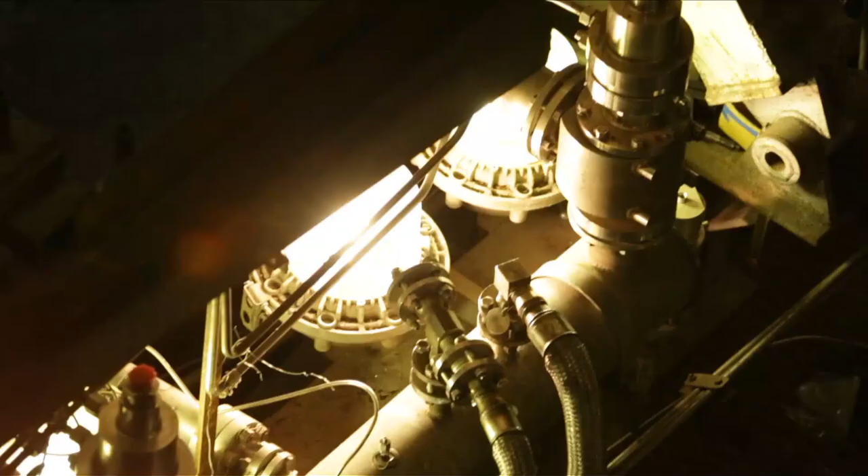The most important event in the career of any rocket engine, except the launch itself, is the final firing test, where the work of the whole engine is checked.

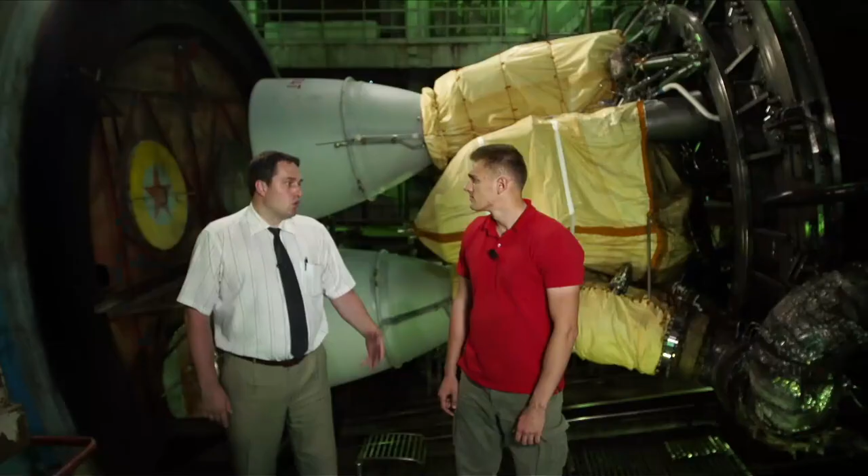Firing tests begin with the cold swing, in which the nozzle mimics the movements according to the flight cyclogram. The chambers are deflected by the rudder drives by 2 degrees. This is how they check for the efficiency of all systems controlling the thrust vector of the future launch.

Right now, you see? To tell you the truth, I'm a bit scared because the movement is very fast.

The RD-180 engines mounted on the stand are located in the armored chamber. After the cold swing, it closes and begins the preparation for the firing test.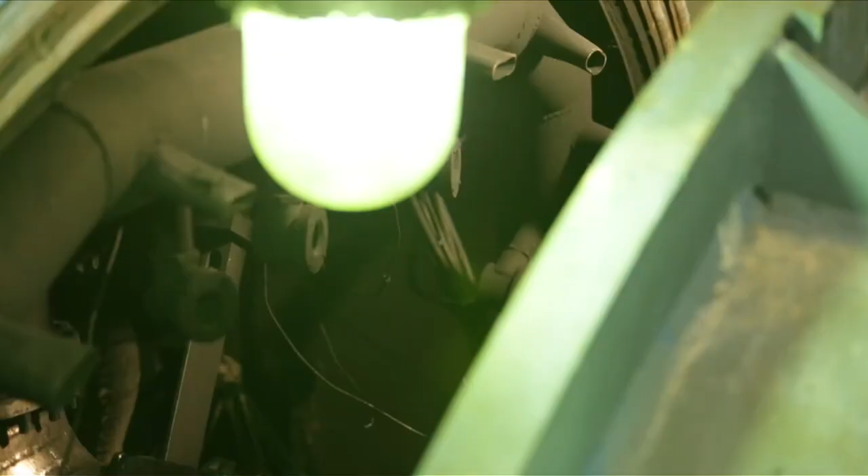The test is operated from the control room. Commands will be transferred via intercom through devices scattered around the stand. The firing test lasts 201 seconds, during which time the engine goes through several modes on the cyclogram, starting from the nominal mode of 100%.

Overall readiness. Start permitted. Attention, start.

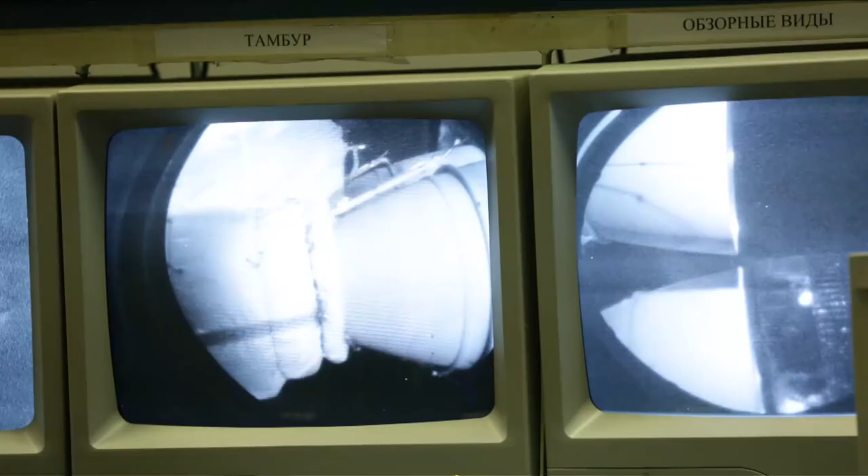Switch to 95% mode. 10. Switching to 63%. 20. This is a kind of experiment for the engine. The data will be recorded in the engine logs, and then loaded onto the rocket carrier's onboard computer. 90, 100, switch to 87%.

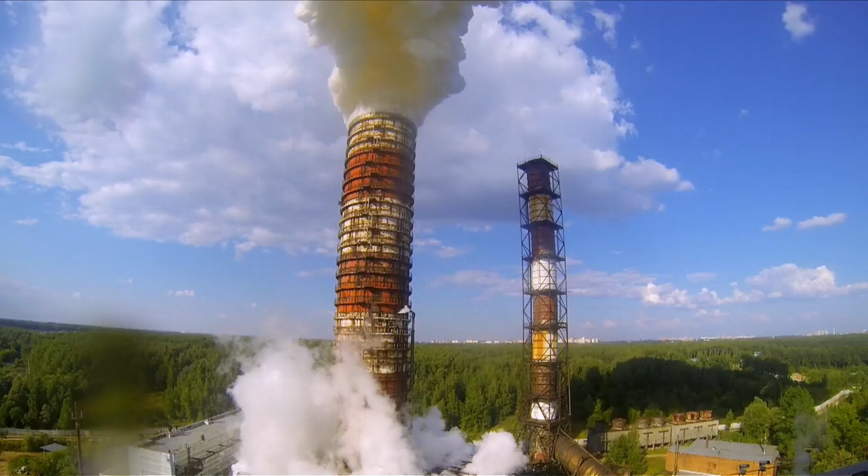140. The engine's thrust is measured by sensors installed in the armored chamber. After launch, the exhaust gases are emitted into the gas duct, after which they go directly to the hydro extinguisher, a huge pool of water in the middle of which is a kind of exhaust pipe that is 100 meters high. The energy of the emitted gases is spent on winding the water in the pool.

Gradually, the jet loses its energy, and the gases mix with the water and become absolutely harmless to the environment, exiting the pipe in the form of white steam. Shut down according to the program.

The day is finally here. We waited for 20 years. Thousands of people have forgotten what vacations and personal life are. Several generations have been working on this project.

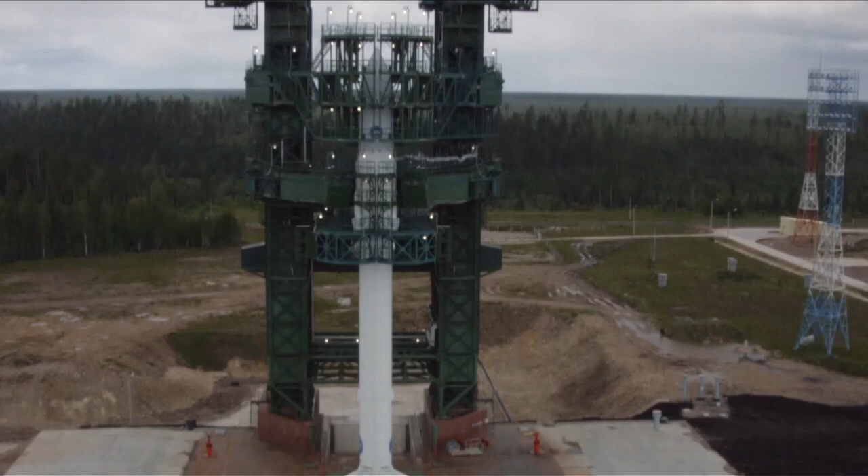5 hours and 35 minutes before the launch, the automatic program for launch readiness starts. All the people have been evacuated from the platform except for the combat crew in the command post, from where the program is monitored.

4 hours before the contact lift, the fueling of the rocket begins. Any decision related to the Angara is approved by a state commission, and even small things can cancel the launch.

One time, the tests were canceled due to an error in the internal protocol of the program. After the rocket was dismantled, they found that the problem was because of a tiny piece of hair in the inter-tank section, which tripped the protection system.

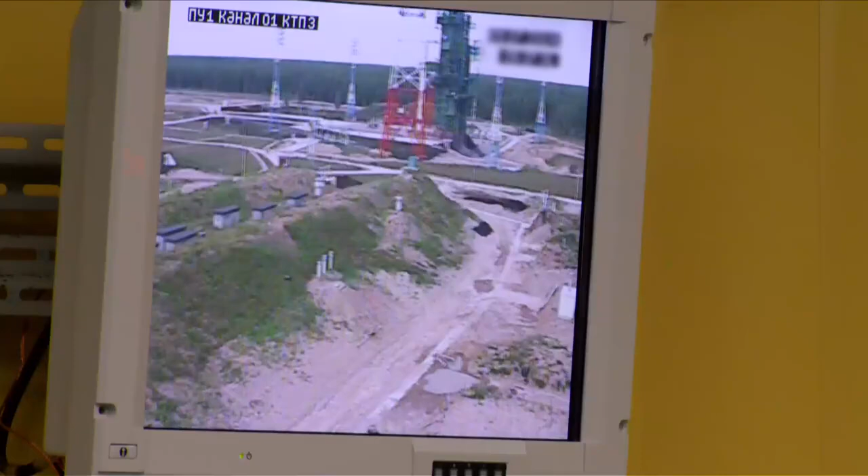You must remember that this is a test start and not a standard start. No one has ever launched this rocket into the sky. No one knows how the equipment will behave. For the worst case, there is a built-in system that leads the rocket away from the launch pad and buildings to a deserted area.

Pre-launch preparation began 5 hours ago. 10 minutes ago, the rocket finished fueling. Angara will sit still for a couple more minutes, check all airborne and ground systems, and then take off on its long journey.

All the people who lived and worked for this project are now waiting in anticipation. Like air, the Russians need an independent access to space, and the launch of the Angara family of rockets can do just that.

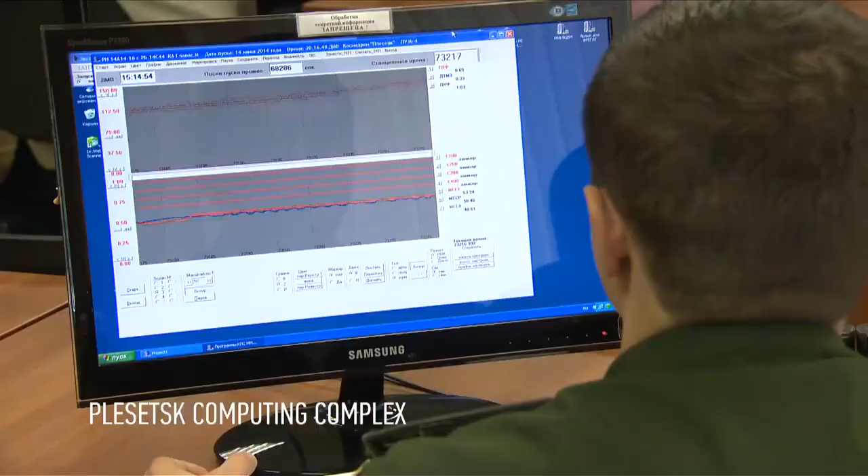Prior to the start, the rocket is monitored by the measurement tools of the spaceport, but as soon as the Angara lifts off the ground, it will be under the control of the Titov Main Test and Space Systems Control Center in the city of Krasnoznamensk. However, Plesetsk will continue to work with the missile, broadcasting coverage of the hardware-software complex to the joint staff of the armed forces. Space control stations accompany the Angara during its entire flight.

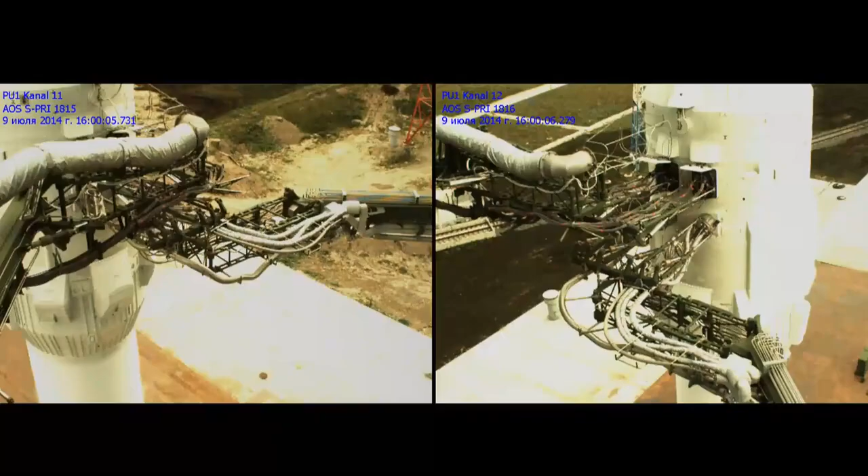Flight steady. Rotation start, flight is steady. Trajectory close to its estimates. 30, control parameters normal. First stage, engine functioning normally. Rotation finished, go stabilization, flight sustainable. Trajectory close to its estimates.

Smoke, fire, and the Angara cuts through the sky. The launch was successful, and within 200 seconds, the rocket will leave the atmosphere. From this moment, we can officially consider the Russian space program independent.

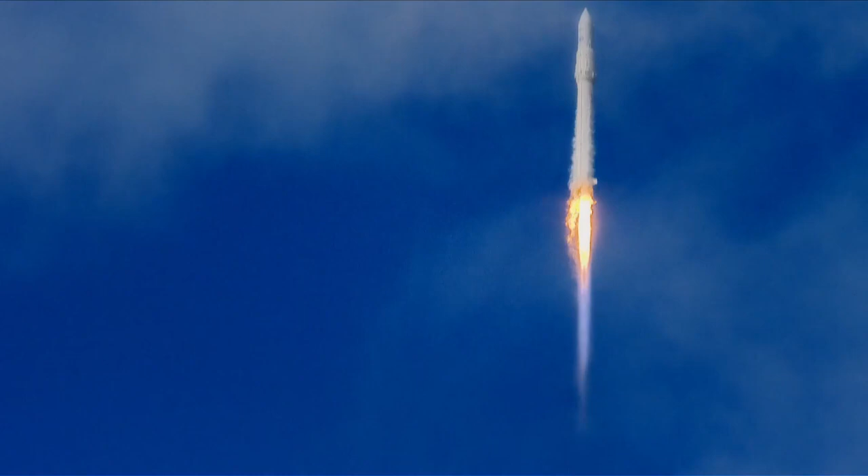After contact lift, the engines work according to the pre-installed program. The cyclogram of the flight says the Angara will continue to gain its predetermined elevation while performing the necessary maneuvers.

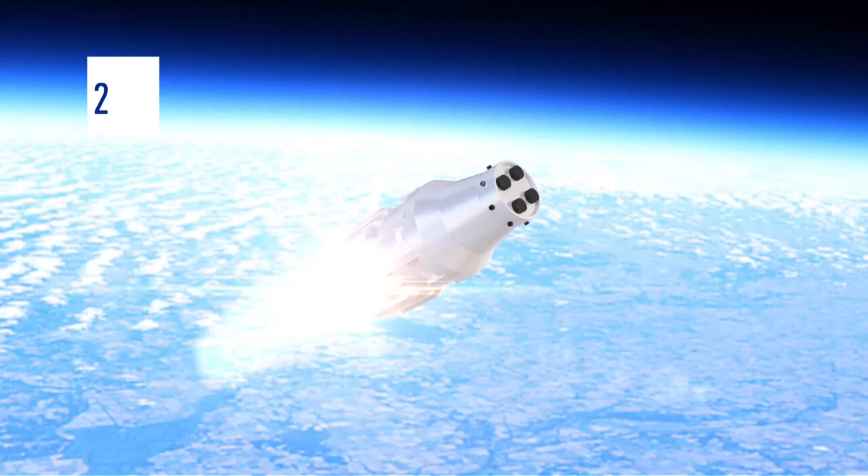Undoubtedly, we are obliged to continue the traditions laid forth by Sergei Pavlovich Korolyov, in order for Russia to remain a great power in the space program. The Angara project has become a reality before our very eyes, just as it is now a reality that Russia has a unique space rocket complex which no one else in the world has.

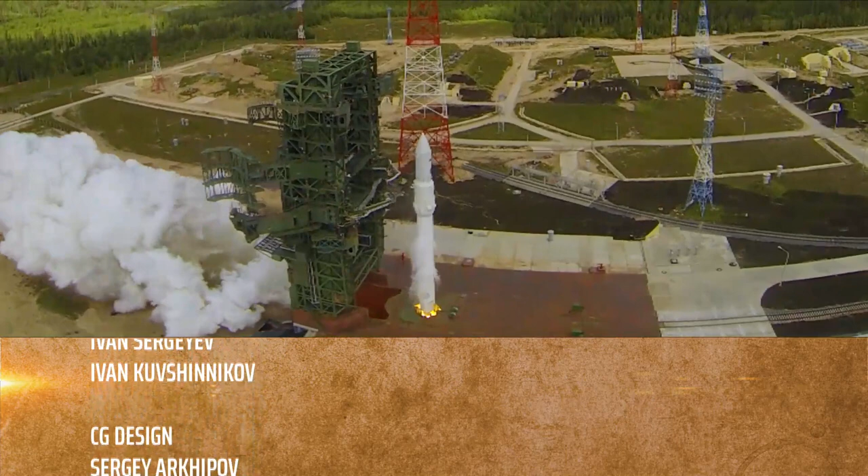Now, Russia's aerospace defense program has a launcher capable of sending a payload that suits the needs of the defense ministry in this large territory of the country. But this is not the limit. In 2017, Russia is planning the launch of a manned version of the Angara rocket, and that is a new challenge for the Russian space program.